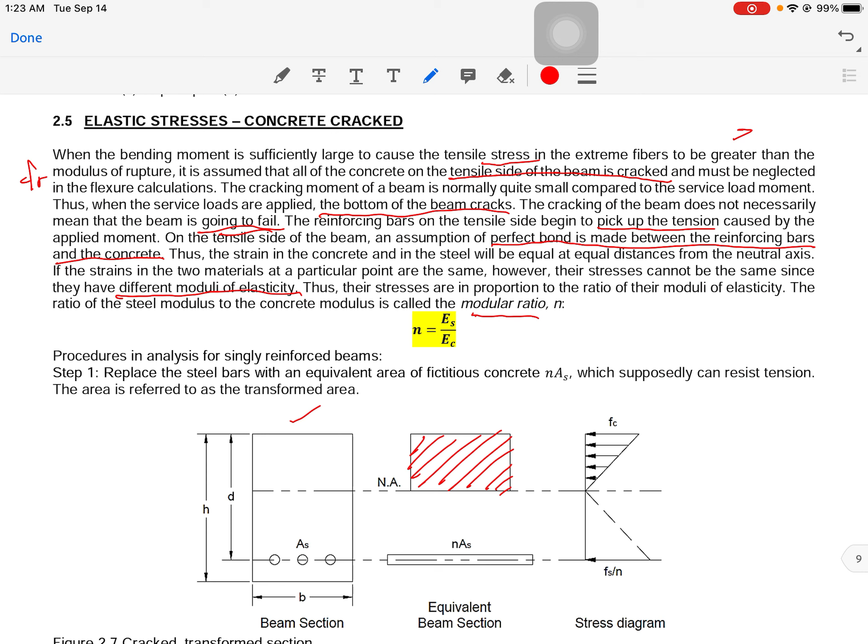So technically, steel and concrete do have different modulus of elasticity, and thus their stresses are in proportion to the ratio of their moduli of elasticity. Take note that the ratio of the steel modulus to the concrete modulus is called the modular ratio, or N. N is equal to ES over EC.

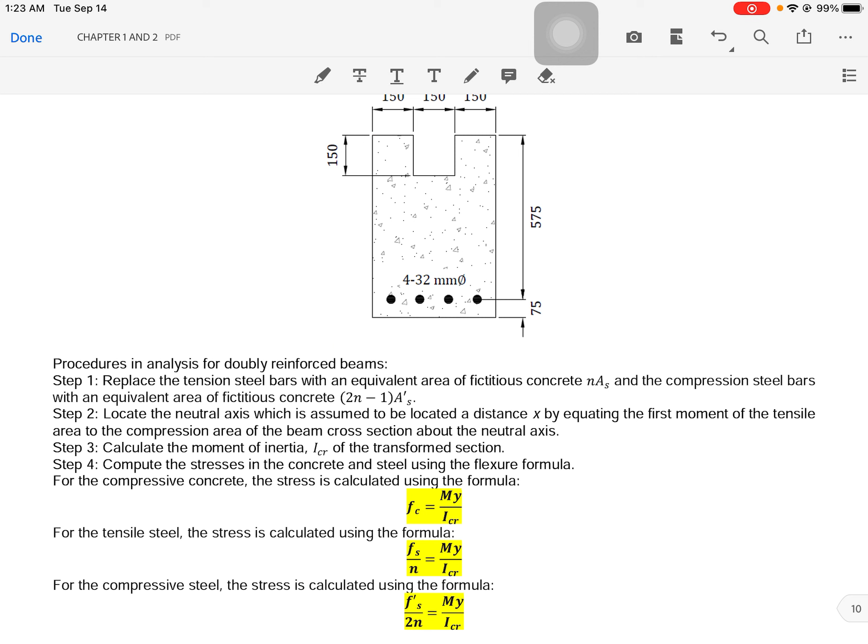So next for the procedure. We have two procedures, or analyses, that we will discuss: analysis for singly reinforced beam and analysis for doubly reinforced beam. Let us discuss first the procedures in analysis for singly reinforced beams.

So here are the steps in order to apply the analysis for singly reinforced beam using the transform method. First step is to replace the steel bars with an equivalent area of fictitious concrete, equal to N times AS, which supposedly can resist tension. So the area is referred to as the transform area, meaning from the original beam section you will have an equivalent beam section.

Since this portion of the concrete is considered cracked, the steel bars will resist and pick up the tension, and this should be converted into N times AS. The remaining part of the concrete is the compression portion of the beam - this is the concrete portion here.

Then for the second step, locate the neutral axis, which is assumed to be located at a distance x, by equating the first moment of the tensile area to the compression area of the beam cross section about the neutral axis. Later on we will discuss further what this x distance is in our example. Normally, x distance is denoted on the concrete portion, or the compression side.

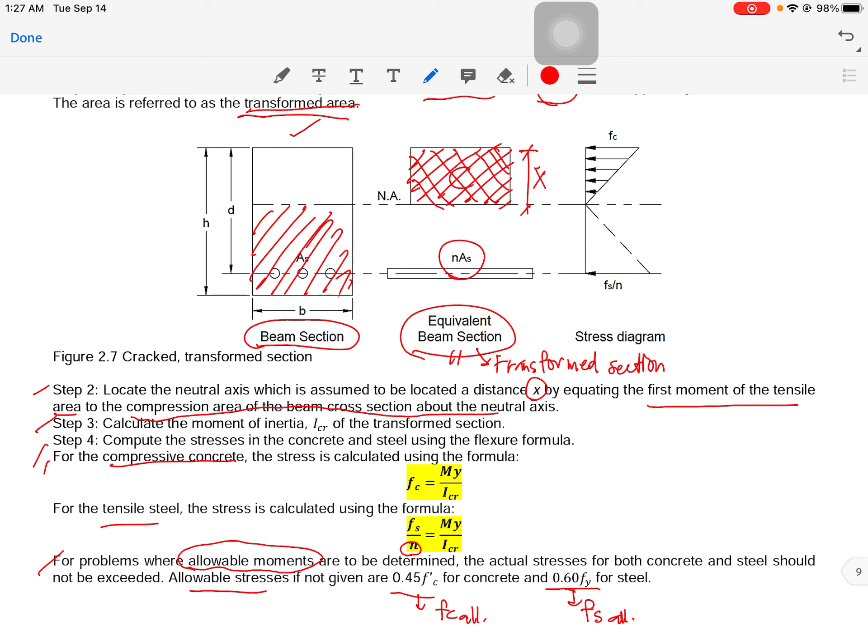So those are the simple procedures for a singly reinforced beam. Let us discuss the first example, which is example 2.3.

We are tasked to calculate the bending stresses in the beam using the transform area method given the following properties: F prime c is 21 MPa, given moment is 95 kilonewton meter, B or the width is 300 mm, the total height H is 500 mm, effective depth is 425 mm, and As is 3 bars at 28 mm diameter.

For letter B, we are tasked to determine the allowable resisting moment of the beam if the allowable stresses for concrete is 9.45 MPa and 138 MPa for steel.

Okay, let me draw this example 2.3. Let me draw the beam, guys. So our beam is this one here. We have three bars, 3 28mm bars. Then this is 500 mm.

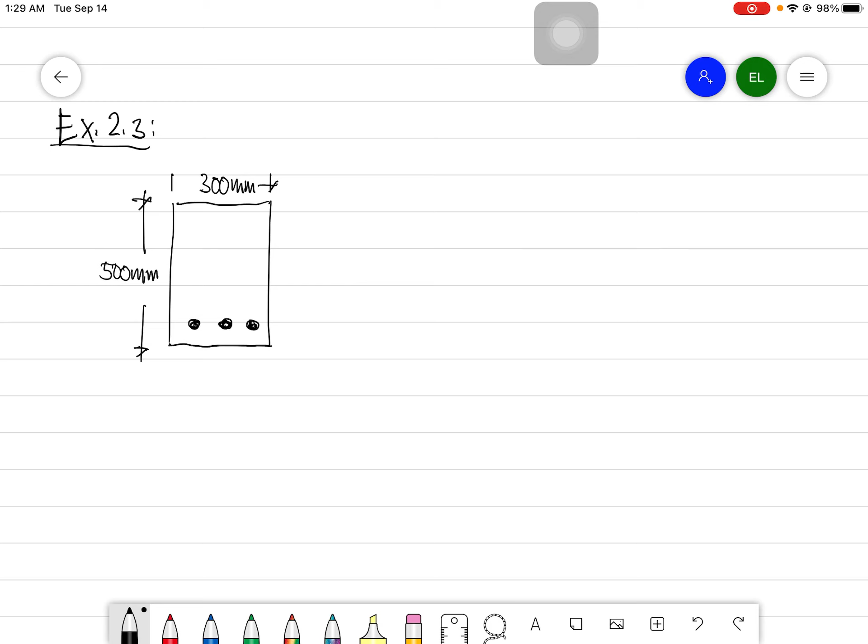Then this is 300 mm. Then we have the distance here, which is equal to 425 mm. So this is our beam section. Then we will have...

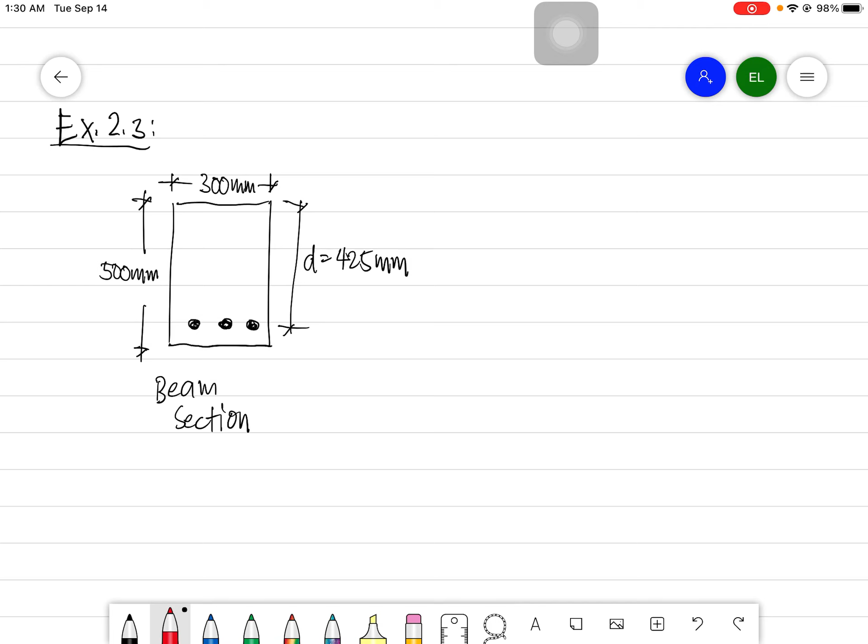From the question, we are tasked to get the bending stress using the transform area method. So let us follow the first procedure: we are tasked to replace the steel bars with the equivalent fictitious concrete. So we will have a transform area, or this equivalent beam section here.

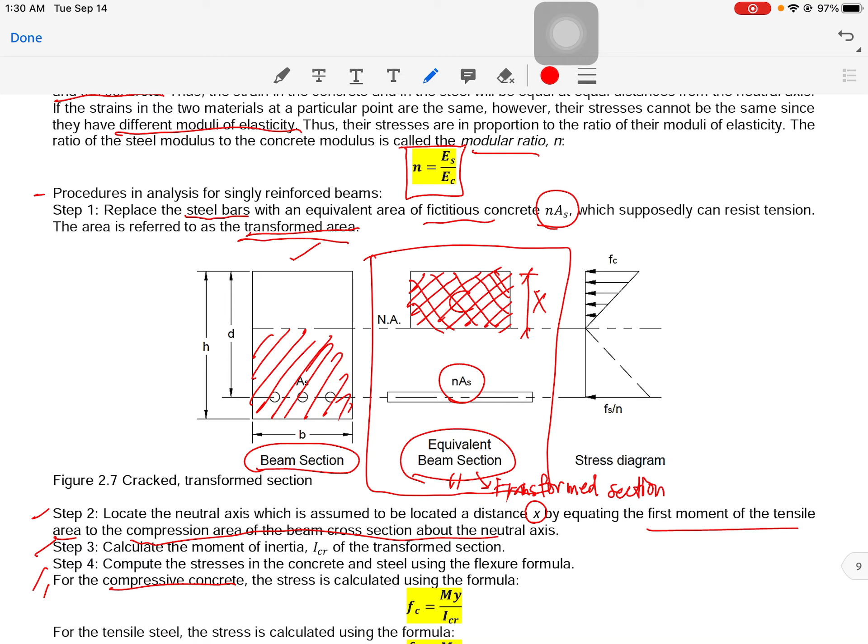So this is our transform section. Say this is the only concrete that remains, or the remaining concrete. So this is still 300 mm. Say this is the neutral axis, so we'll just assume that one. Then from the bars, we have this fictitious concrete area for the bar, which is equal to n times As.

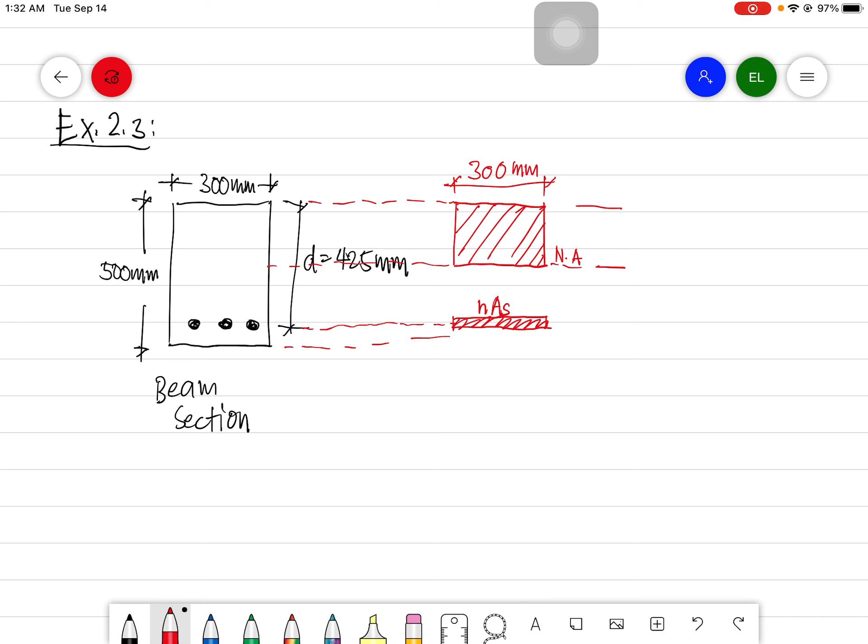With that, let us proceed to the second step, which is to locate the neutral axis, assumed to be located at an x distance, by equating the first moment of the tensile area to the compression area of the beam cross section about the neutral axis. So this is now the x distance being mentioned, and from the neutral axis to this portion of the bar, this is d minus x.

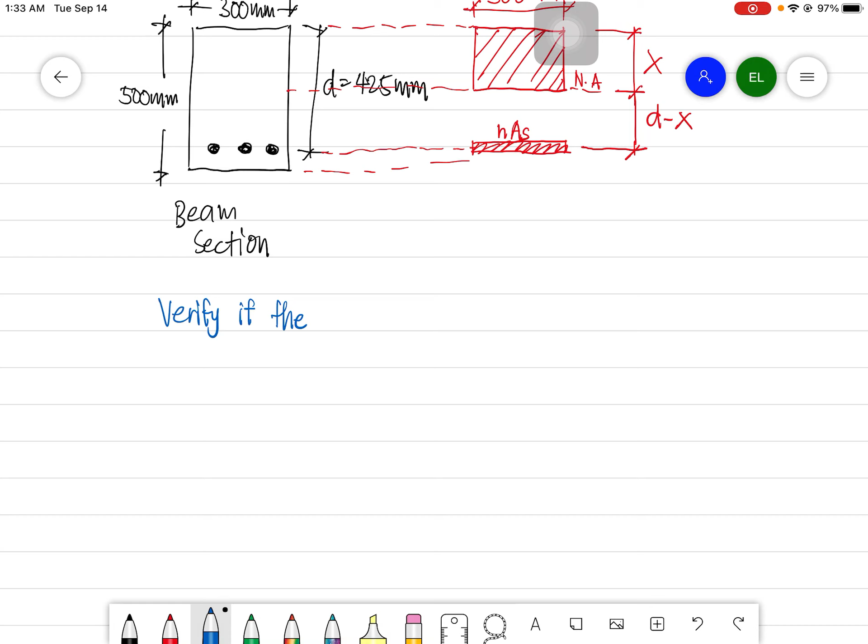In order for us to locate the neutral axis, first we need to verify if the beam is cracked. So let me verify that one. We have the formula that we already know, that...

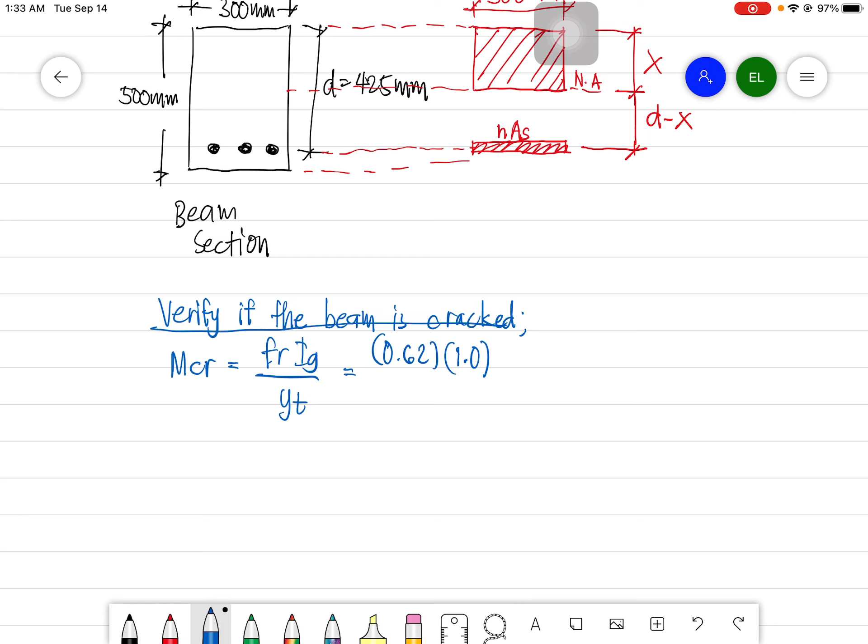MCR is equal to FR IG over YT. We have FR, which is equal to 0.62, times 1.0, since this is a normal weight concrete. Then we have the square root of 21.

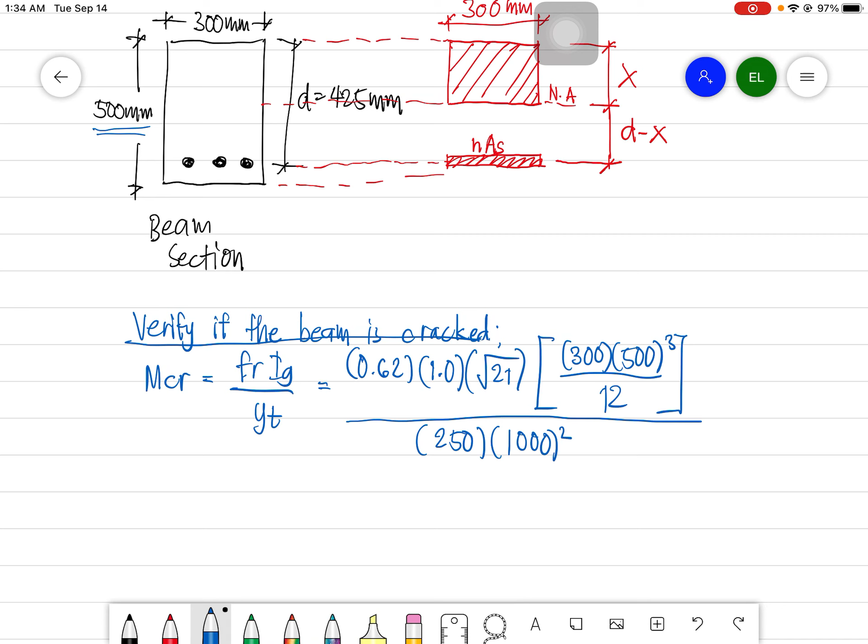Multiply it with IG, which is equal to B H cubed over 12, then all over YT. So YT is half the total depth, which is 500, so YT is 250 mm. Then multiply it with 1000 squared, so that we could get a value of moment in kilonewton meter unit. So we have MCR, which is equal to...

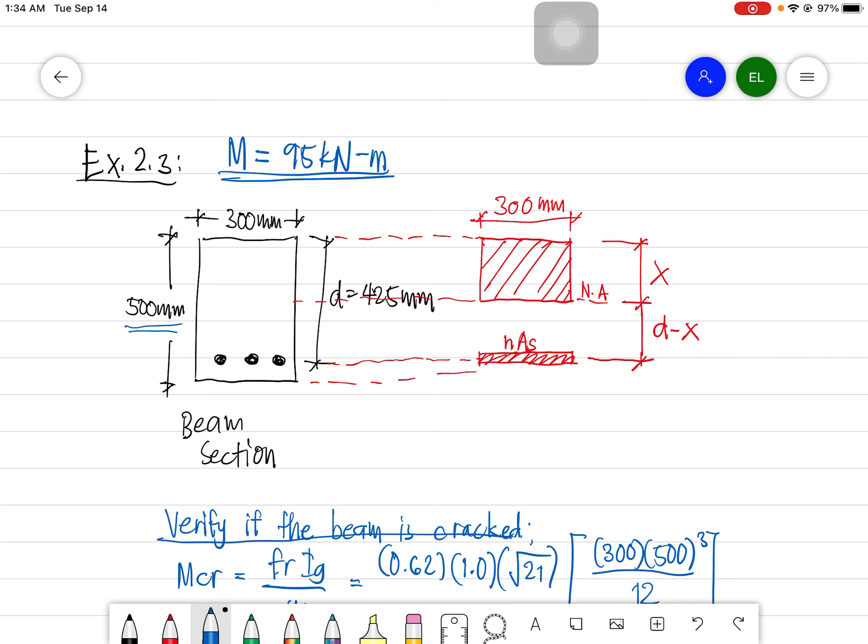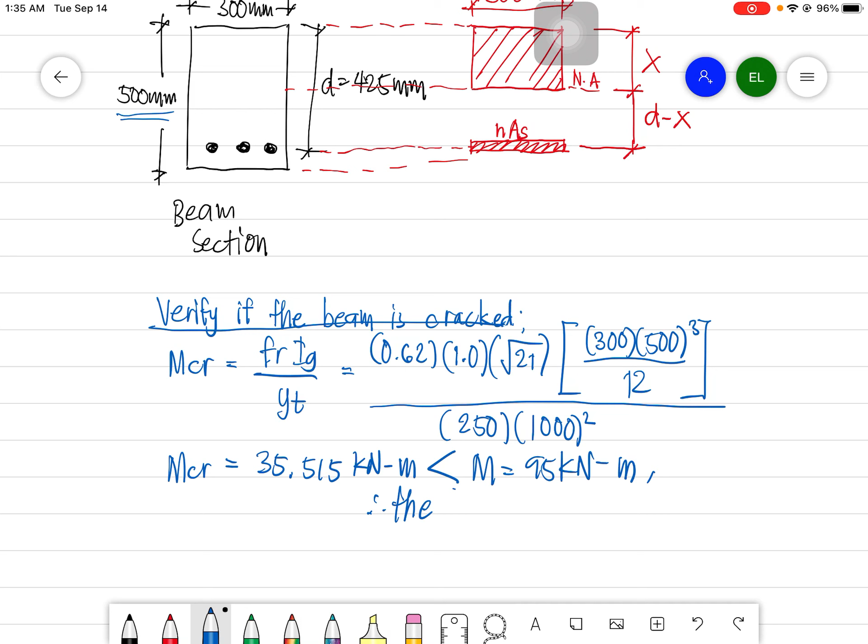35.515 kilonewton meter, and from the given, M is equal to 95 kilonewton meter, the moment applied in the example. Therefore, since MCR is less than M, which is 95 kilonewton meter, the beam is cracked.

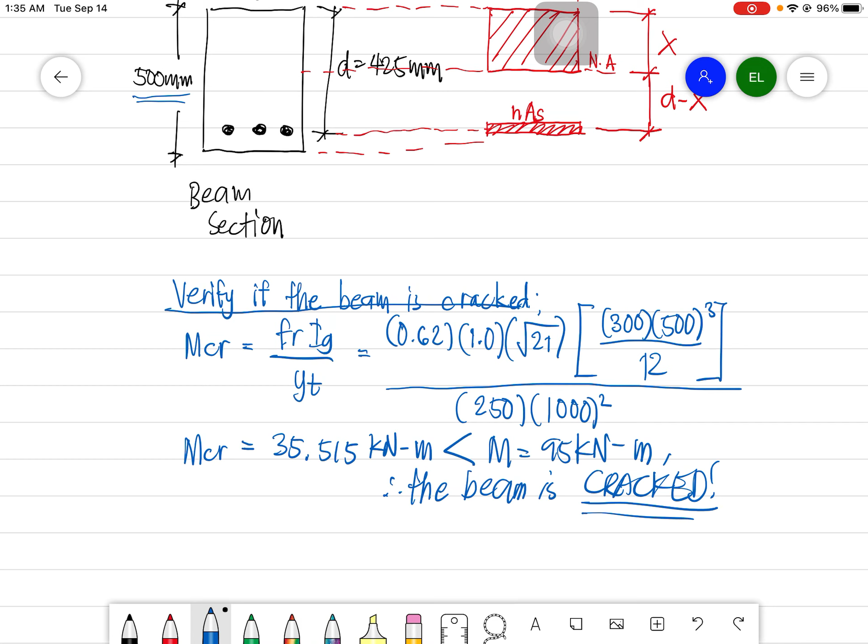Okay, so we already verified that the beam is cracked. So therefore we are on the right track of computing the bending stress using the transform method. Since it is cracked, we are now tasked to locate the neutral axis.

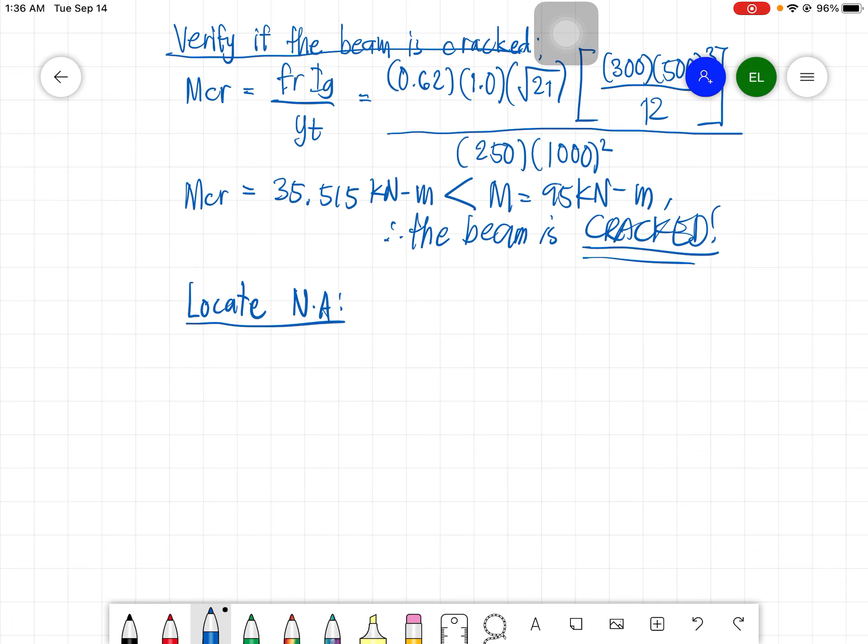So, locate NA. First, we will get the first moment of the tensile area with respect to the compression area about the neutral axis, as mentioned here, then equate the two: the first moment of the tension area and the compression area.

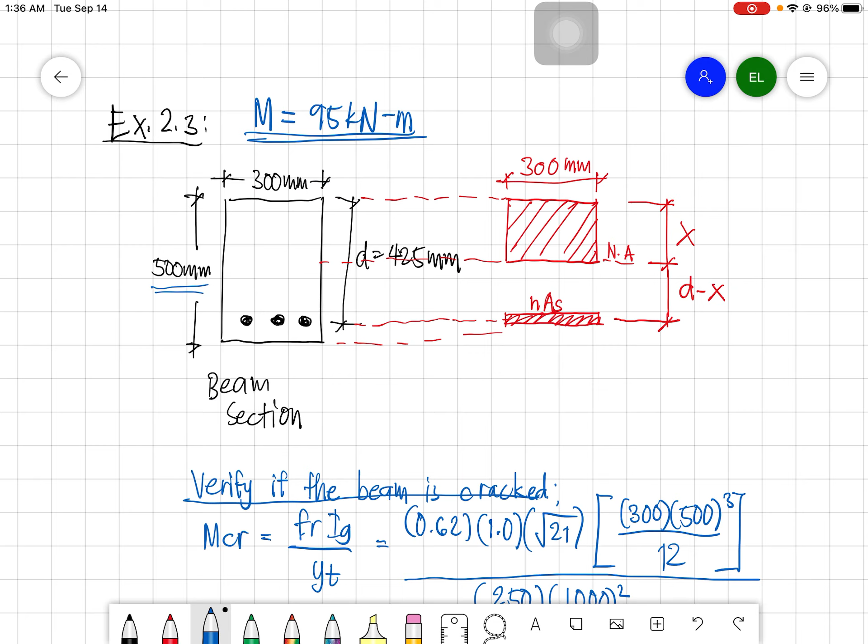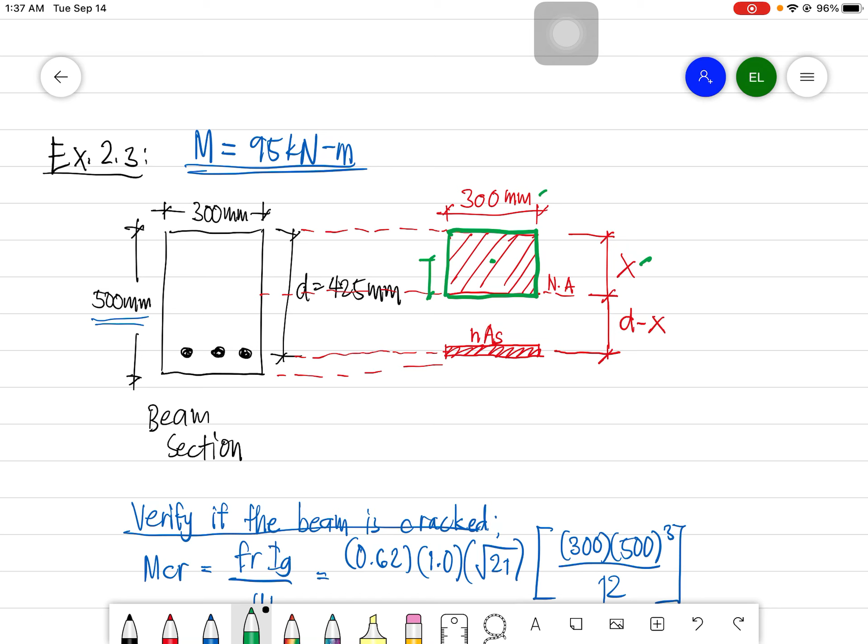In order to get the first moment, we have 300 times x, times x over 2 for the compression part. This is the area, times bar x, which is x over 2.

Then equate it with the tensile area, which is the nAs, times d minus x, this one here, the nAs then times d minus x.

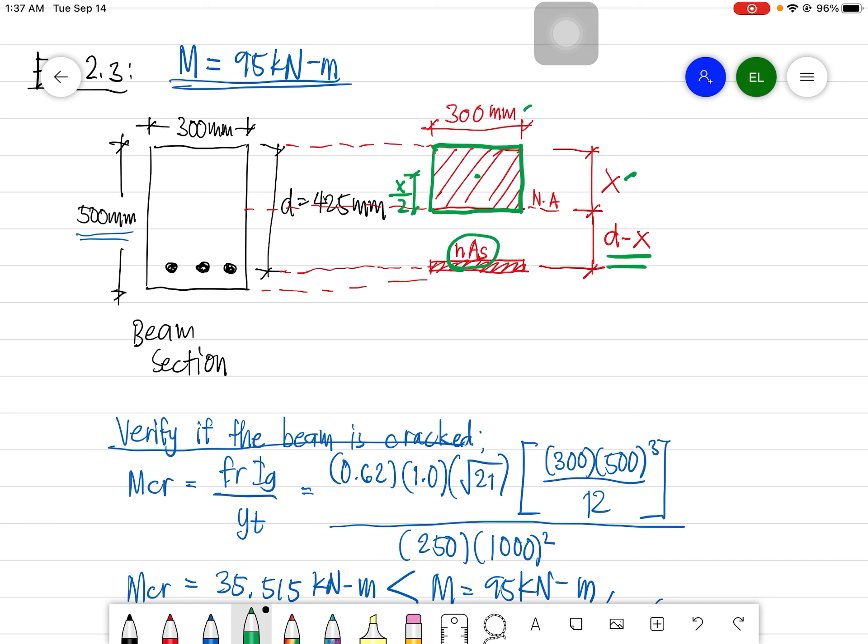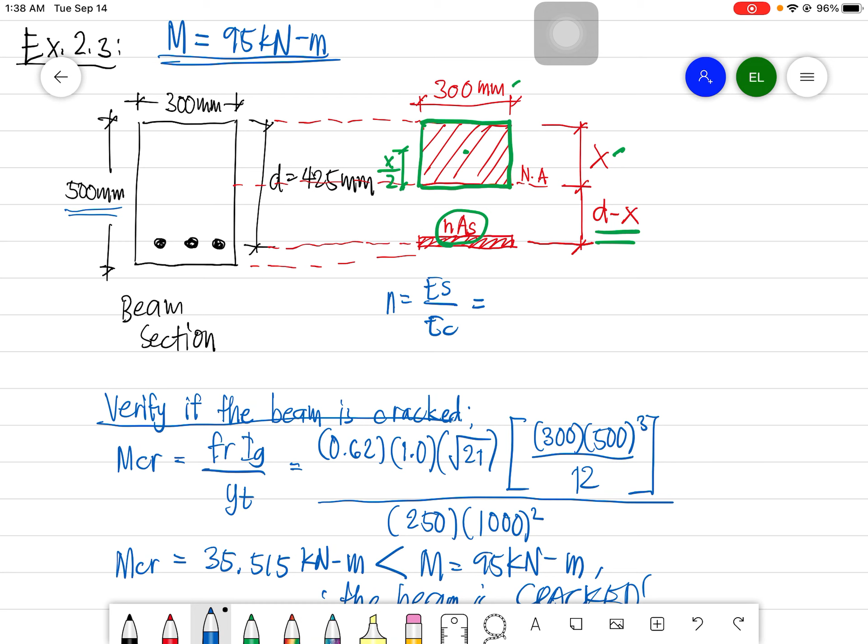So let us compute first the nAs. N is equal to Es over Ec, which is equal to 200,000 MPa over 4,700 square root of 21. Note that n should be in whole number, and I think this is rounded off to 10. So n is 10.

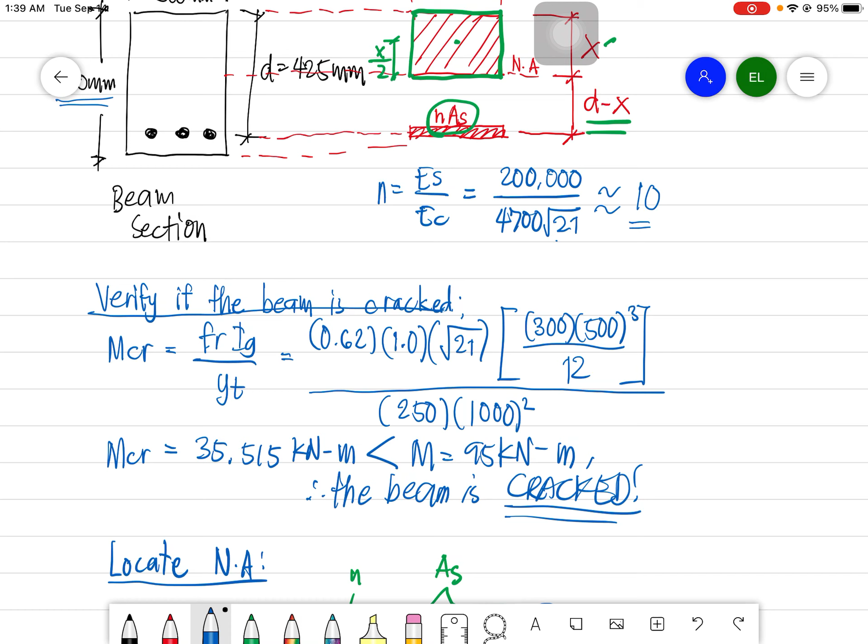So this is now 10, then times As. Since you have the diameter, the area of the bar is pi over 4 times 28 squared, then times 3, since we have 3 bars. So this is N, and this is As, the area of the circle of the bar, times 3 pieces of bars.

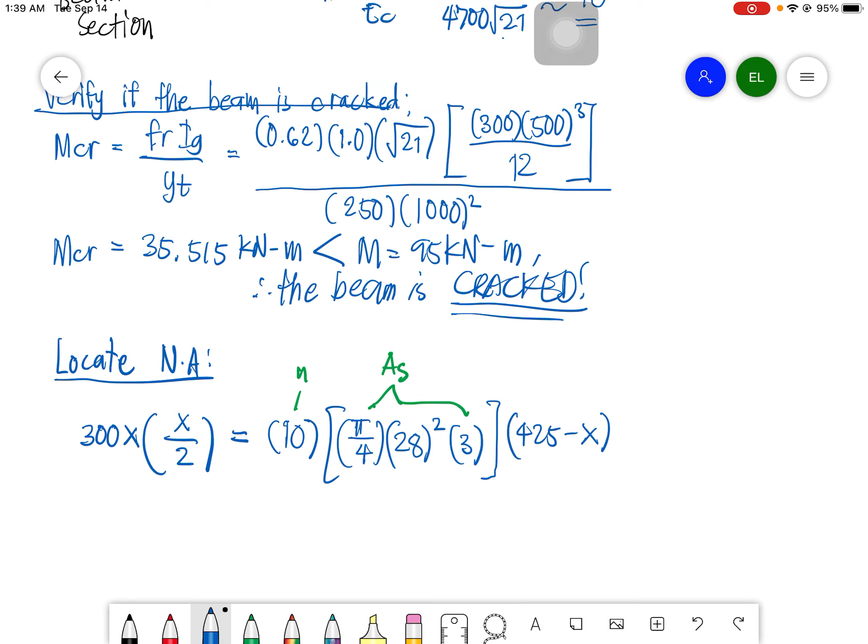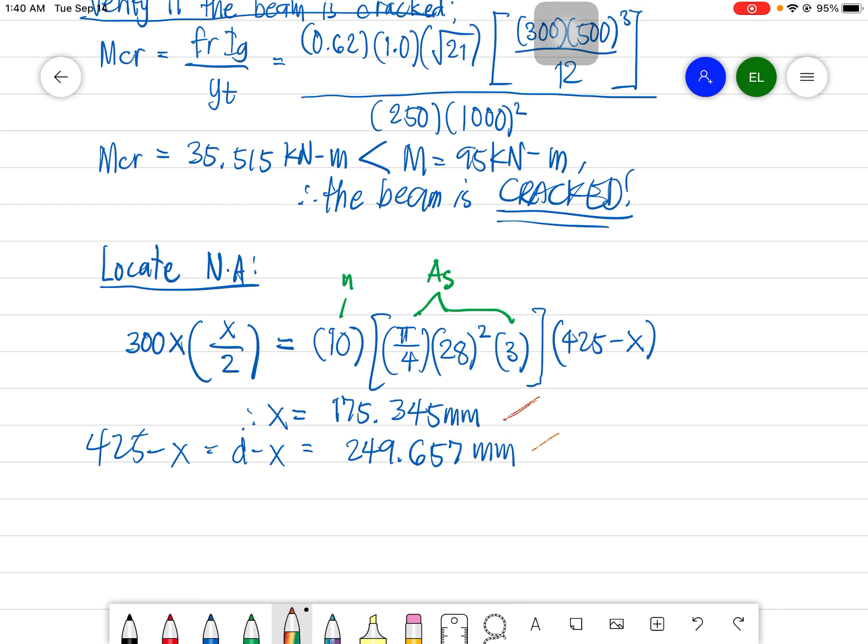Then do not forget bar x, which is d minus x, wherein d is equal to 425 minus x. Try to calculate that for you to get the value of x. I think x is equal to 175.345 mm. So let me get the value of d minus x as well, which is equal to 249.657 mm, since this is 425 minus x. So these are the values for x and d minus x.

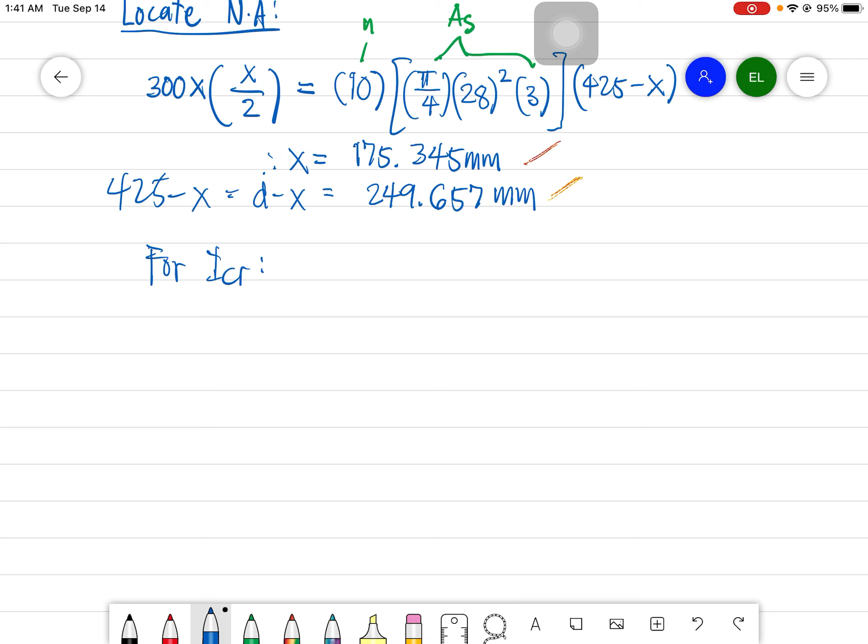Okay, so now we need to proceed to our next step, which is to calculate the moment of inertia of the cracked section, or the transform section, which is the ICR. For ICR, we have ICR equals summation of Ix plus Ad squared. I think you're familiar with this one: the local moment of inertia plus the transfer formula, which is area times d squared.

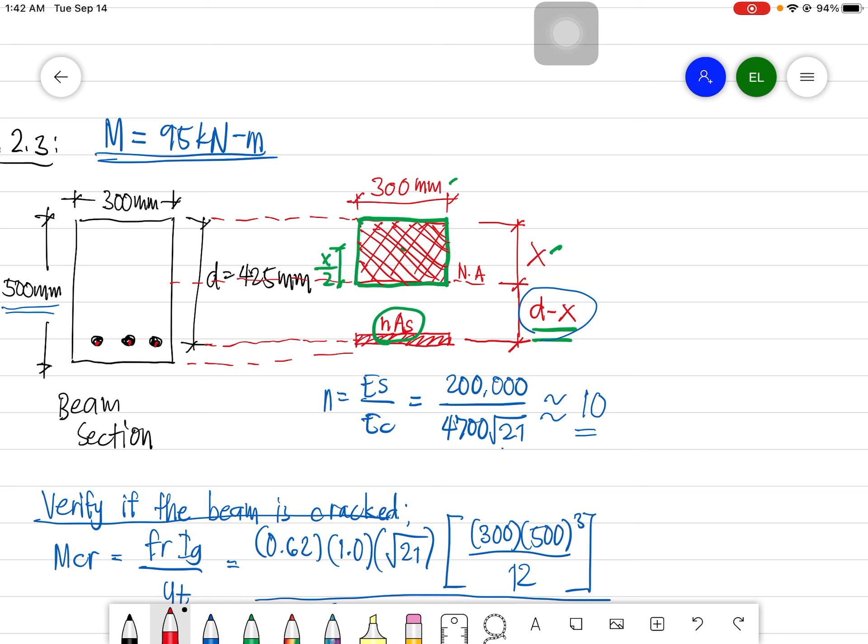Let me get first the inertia for the concrete portion, or the compression side, which is equal to 300, b, x cube over 12. Note that this came from this one, the concrete portion on the compression side of the beam, so we have h cube over 12. Definitely we have the value for x already, this one here.

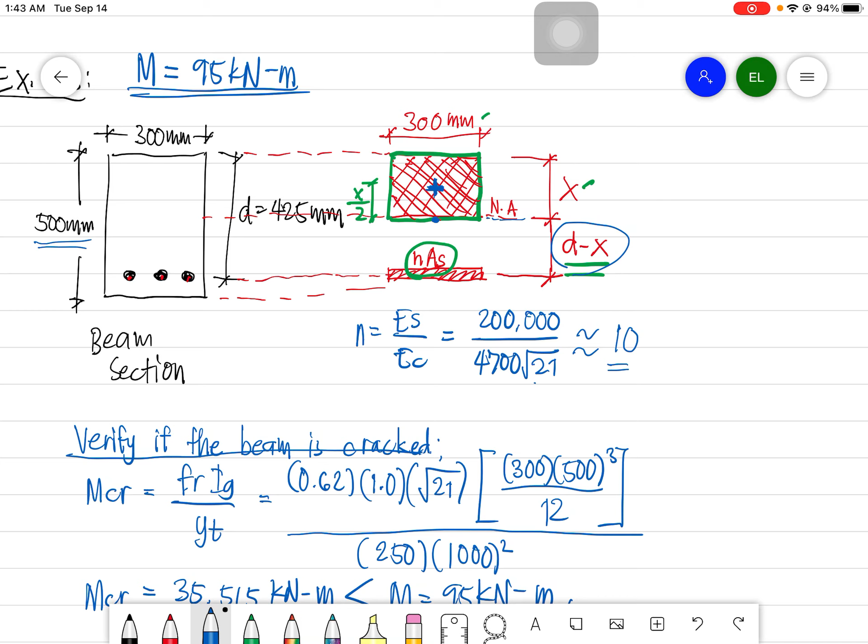Then plus area, 300 times x, then x over 2 squared. We need to transfer that since the local centroid of the concrete is here, and the neutral axis, or this point here, is the global centroid for the section.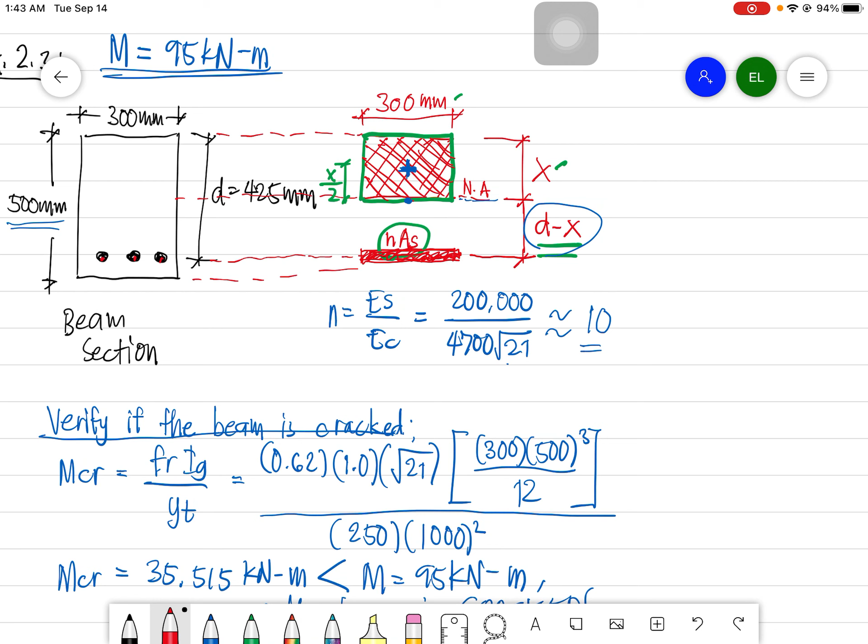So we need to transfer the inertia of the concrete portion. Then we are already finished with the concrete side or compression side, so we need to add the tension side, which is nAs times d squared. We don't have Ix for the tension side because that is very little in portion, as you can see here, so this is now converted into Ad squared.

So let me get the value of nAs. I think nAs is equal to 18,472.565 mm squared. Please verify if this is really the value for this calculation here. So that is area, which is 18,472 point... let me erase this one.

18,472.565, times area d squared, 425 minus x squared. Take note that you may still simplify this equation here. So that would be simplified into bx cubed over 3. Just simply add 1 over 12 then plus 1 over 4. Now if you try to simplify this equation, that will be equal to bx cubed over 3, then plus 18,000. Let me rewrite 5, 6, 5, then 425 minus x squared.

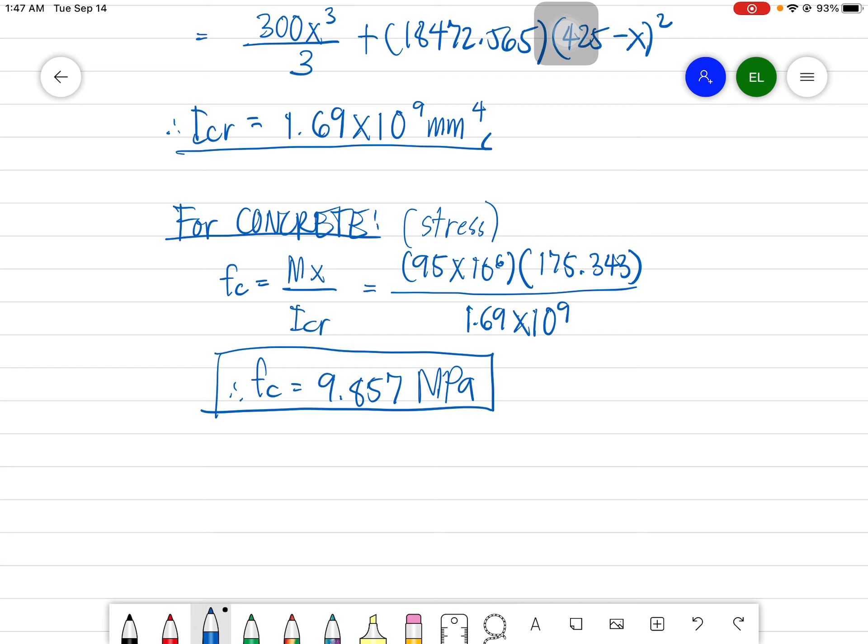So this is the stress for concrete, the concrete stress. Then for steel,

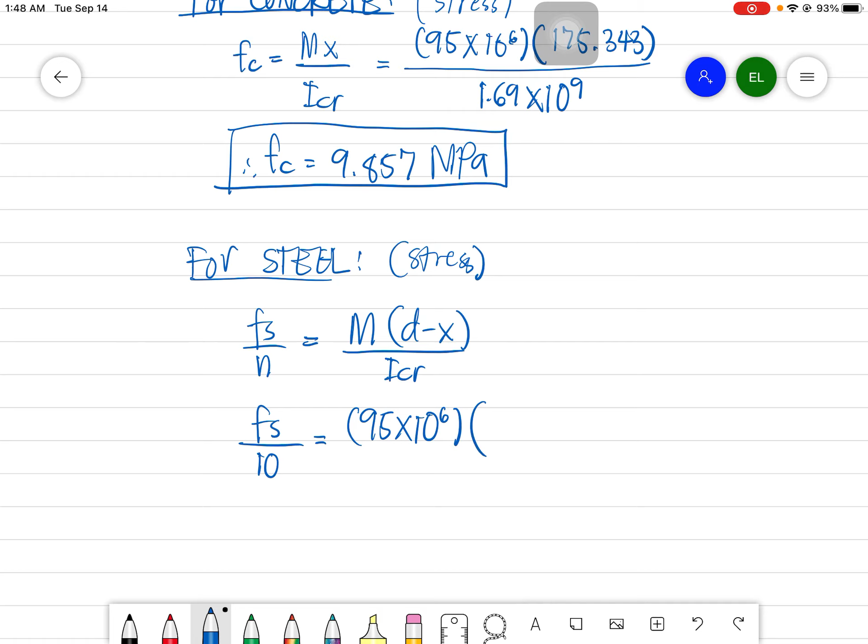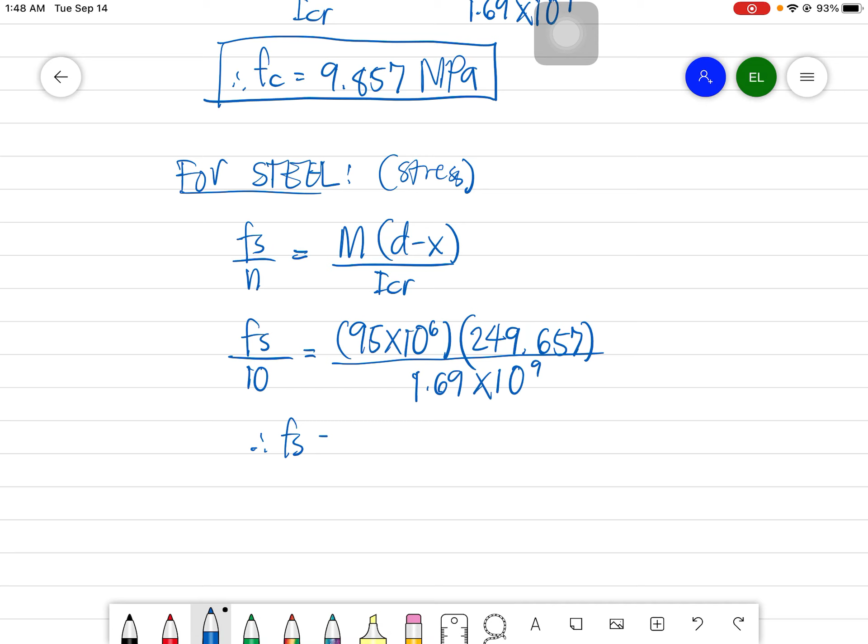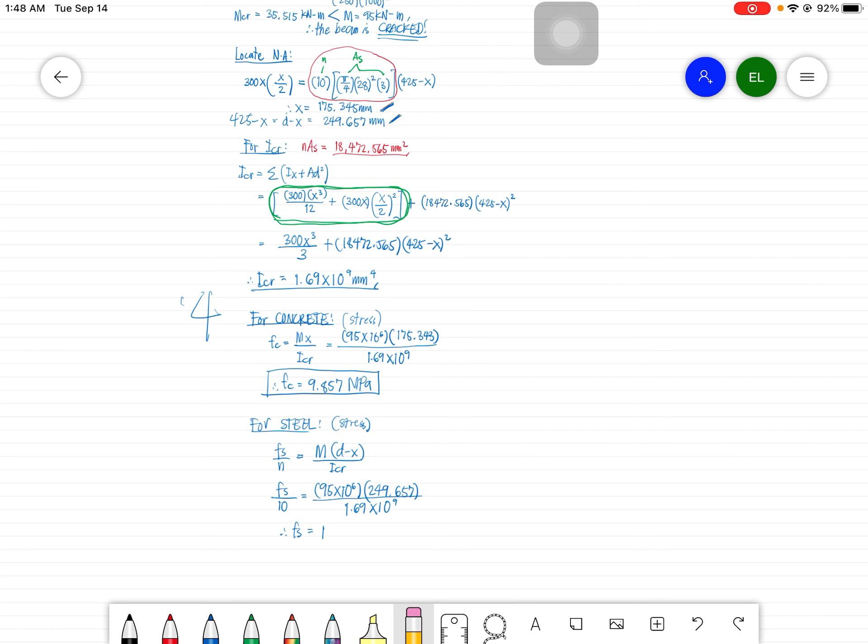stress for steel, so we have Fs over N, which is equal to M times D minus X over ICR. Fs over N is 10, M is 95 times 10 raised to 6, D minus X as computed earlier is equal to 249.657, then all over 1.69 times 10 raised to 9. Therefore Fs is equal to 140.34 MPa. So that is for our Fs.

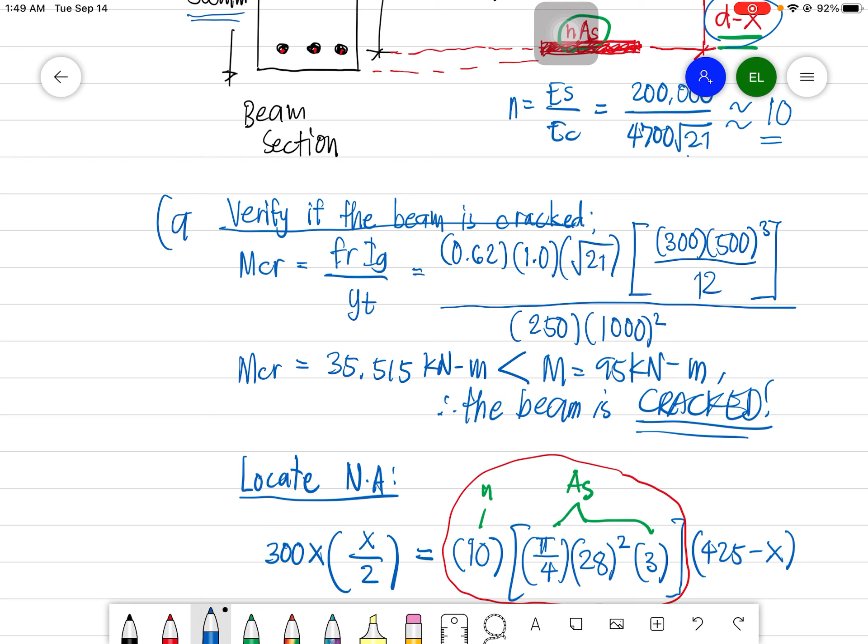So next, that is for letter A. This is for letter A. Now let me solve letter B.

So letter B, we are tasked to determine the allowable resisting moment of the beam with these given allowable stresses for concrete and steel respectively. So we have, for concrete, we're given FC allowable, that is less than or equal to 9.31 MPa.

So now we have M. So the formula of FC, which is M allowable times X over ICR should be less than or equal to 9.31 MPa. So we have M allowable, let me multiply this with 1000 squared for us to get a moment in kilonewton meter, then times 175.343, over ICR, which is 1.69 times 10 raised to 9. This is less than or equal to 9.31 MPa. So therefore M allowable, using the concrete condition of stress, which is 9.31, this is equal to 89.73 kN-m.

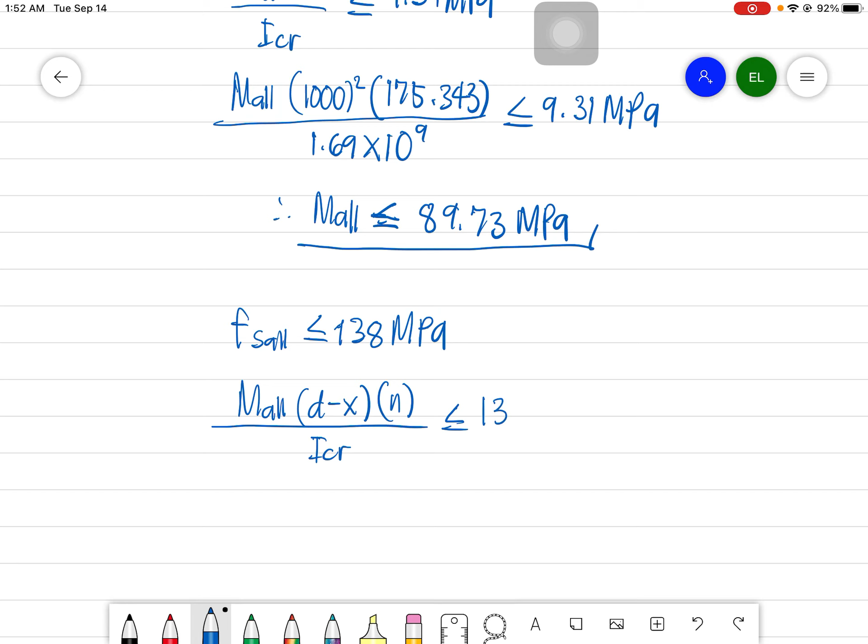Then how about if we'll be using the FS allowable, which is less than or equal to 138 MPa. So we have that formula for Fs, and we have M allowable times D minus X times N, over ICR. This should be less than or equal to 138 MPa. So we have M allowable, again multiply it with 1000 squared, then we have 249.657, that is our D minus X, then we have our modular ratio, which is 10, over ICR, which is 1.69 times 10 raised to 9, less than or equal to 138 MPa. So we have therefore the M allowable, using the allowable stress for steel, which is 138 MPa, equal to 93.42 kN-m.

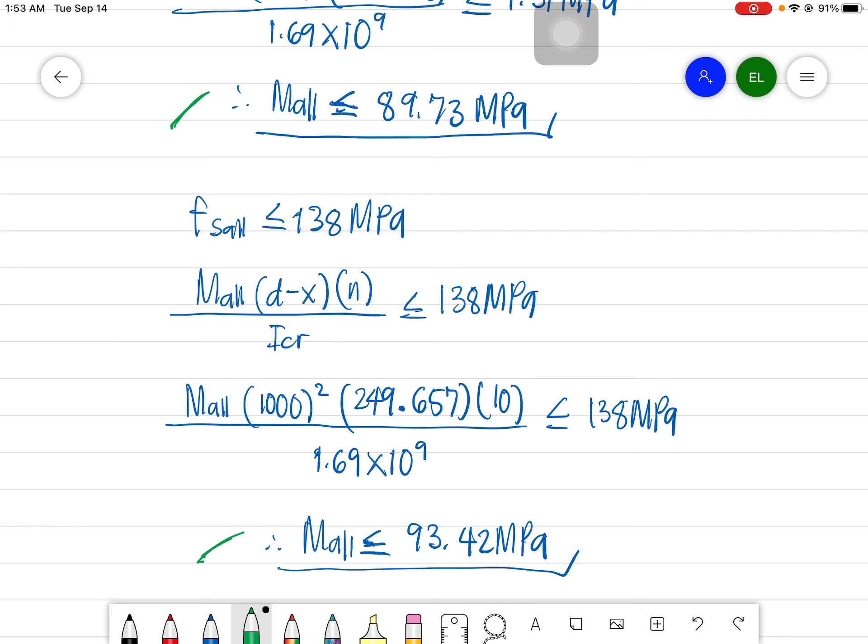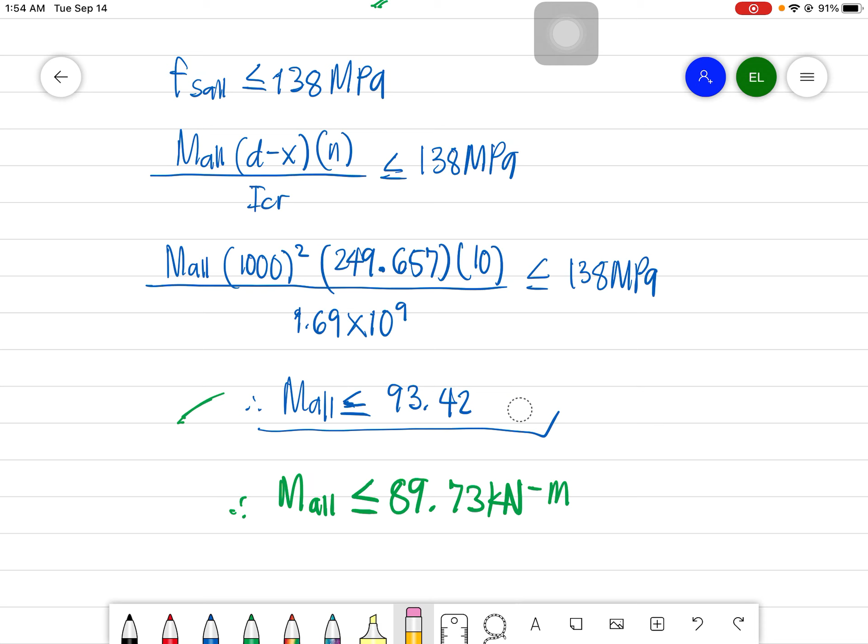So the question now is that we have two values of allowable resisting moment for the beam: one for concrete, and one for steel. But we have to choose one allowable resisting moment compatible for both concrete and steel conditions. So we need to choose between the two values, the lesser value, which is 89.73 kilonewton meter. Let me correct this, this must be in kilonewton meter, as well as this one.

Okay, this should be in kilonewton meter. So therefore the answer is 89.73. So the explanation for that one is that...

If you will consider this value, then your beam might fail, might fail in the compression side, in the concrete side, since the allowable moment for the concrete is only 89.73.

So if you apply this moment into the steel portion, or the tension side of your beam, that won't hurt, since the allowable moment there is 93.42. So you still have an allowance of 4 kilonewton meter.

So we get the lesser value to ensure that both the concrete and steel are safe when this moment is applied on the beam, with the following conditions: Fs allowable, which is 138, and Fc allowable, which is 9.31.

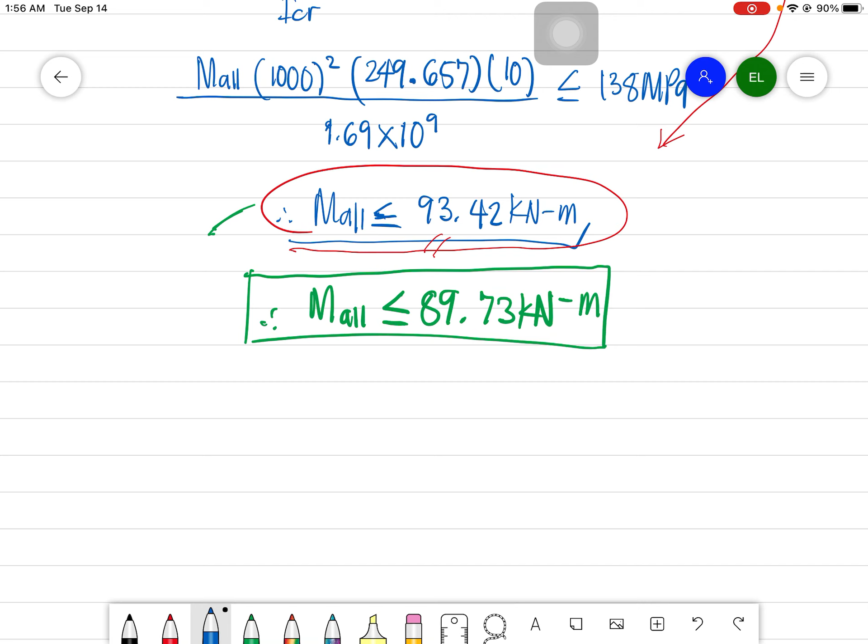I hope it's clear already for our first example. So that is for our first example. Let us proceed to our next example, which is example 2.4.

For example 2.4, we are tasked again to calculate the bending stress on the concrete and reinforcing steel using the transformed area method, with the value of n, which is 9, and the applied moment of 339 kilonewton meter, with the following properties: width of the web, width of the flange, height of the flange, and the D distance, which is 700 mm.

Expect that this is a T beam. This is a T beam, guys. So let me draw this one. So this is a T beam.

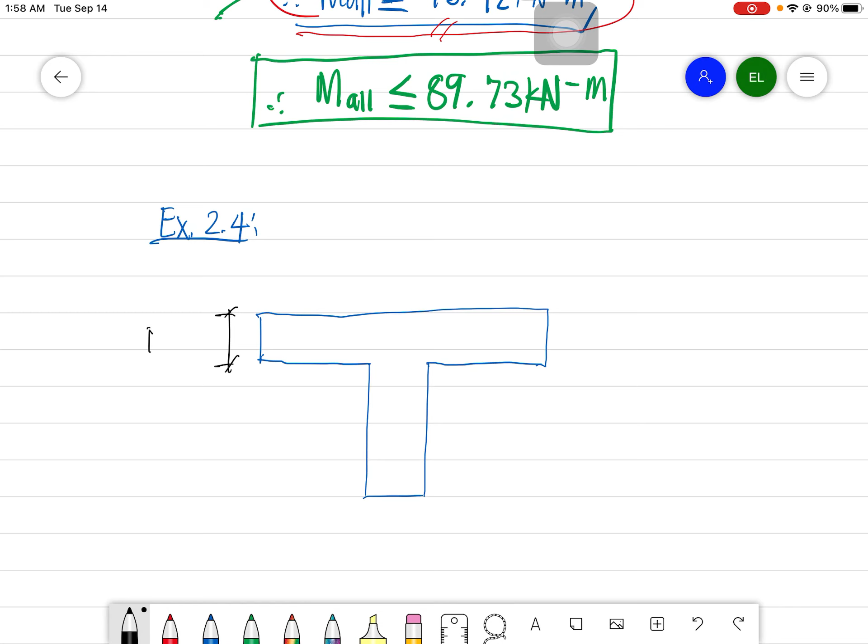So this is 125 mm, and this is 1500 mm. This is BF, this is HF, then we have BW, which is 300 mm.

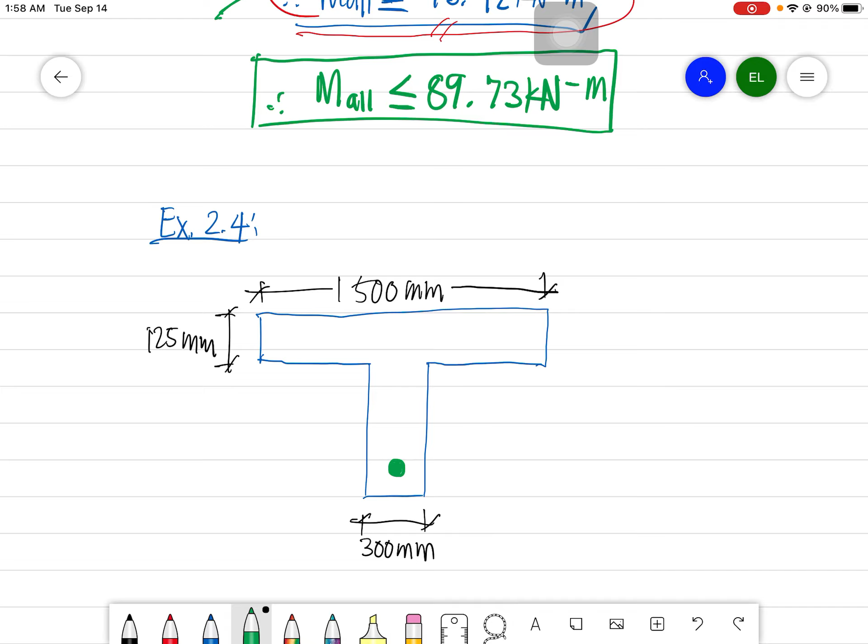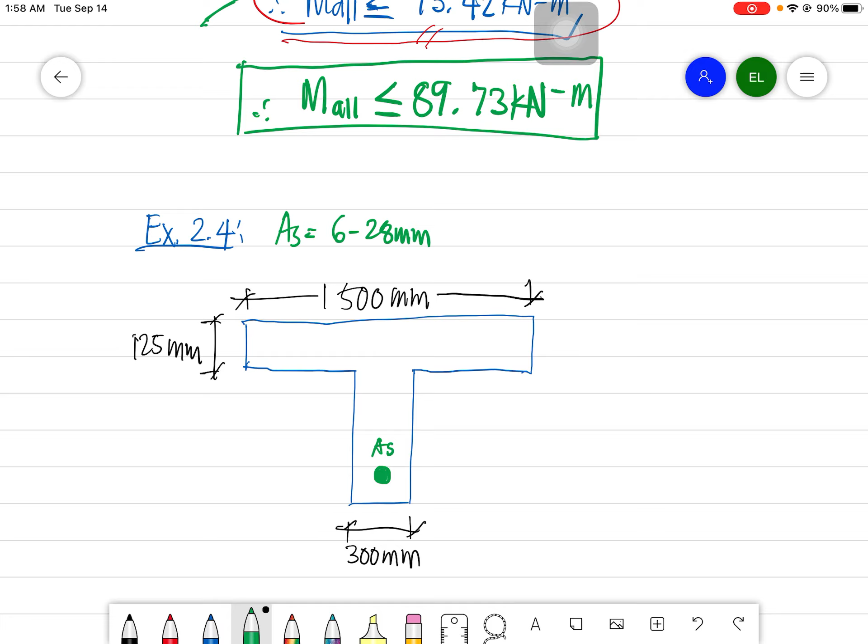Then we have AS, let me put AS here. So we have AS in this portion. I think AS is given, which is 6-28 mm. Then the value of D is equal to 700 mm. That is for the T beam portion.

So first, verify if it is cracked, but I assume that this is cracked already, since the applied moment given, which is 339, is very large or massive. Now this is a massive moment, so you may still verify if it is cracked if you wanted to.

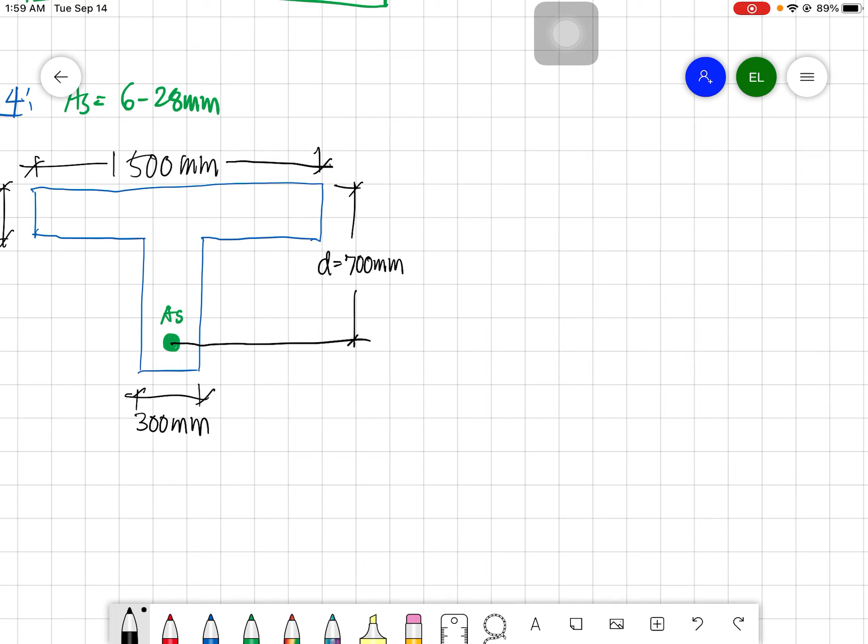Proceeding to our first step, which is to transform this one into a cracked section. So there are two tendencies for the values of x, guys.

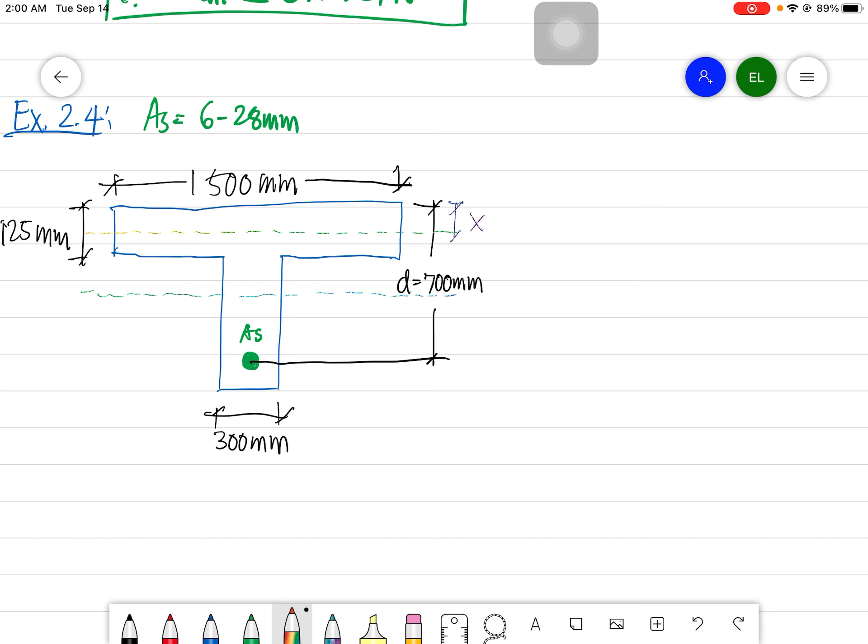Now x might be within the flange, meaning your x might be within this portion here, or there would be tendencies that your x might be within the web. So we have tendencies for this: the x value is within the flange, or your x value might be within the web.

Just assume that it is in the flange, then later on the value of x will reveal that. So if the value of x is less than 125 mm, which is the HF, then it is within the flange; if x has a greater value than 125, or HF, then this is within the web. I hope it's clear now in this matter.

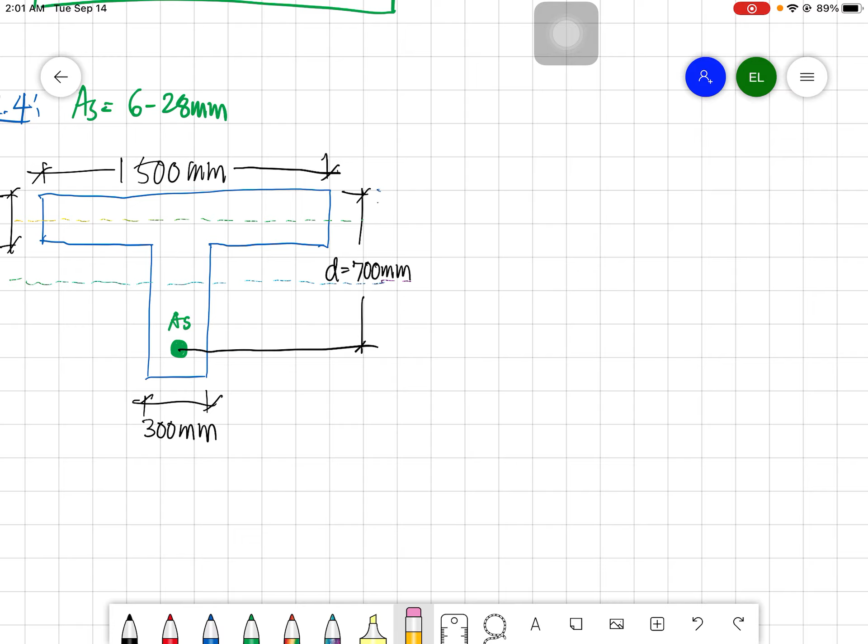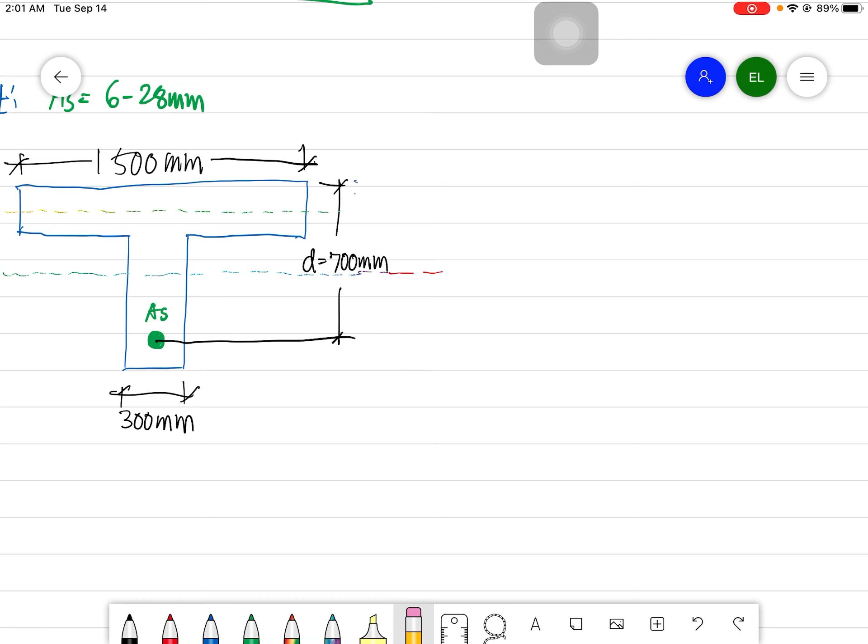But for now, let me assume that x is within the web. Okay, within the web. Now this is our assumption.

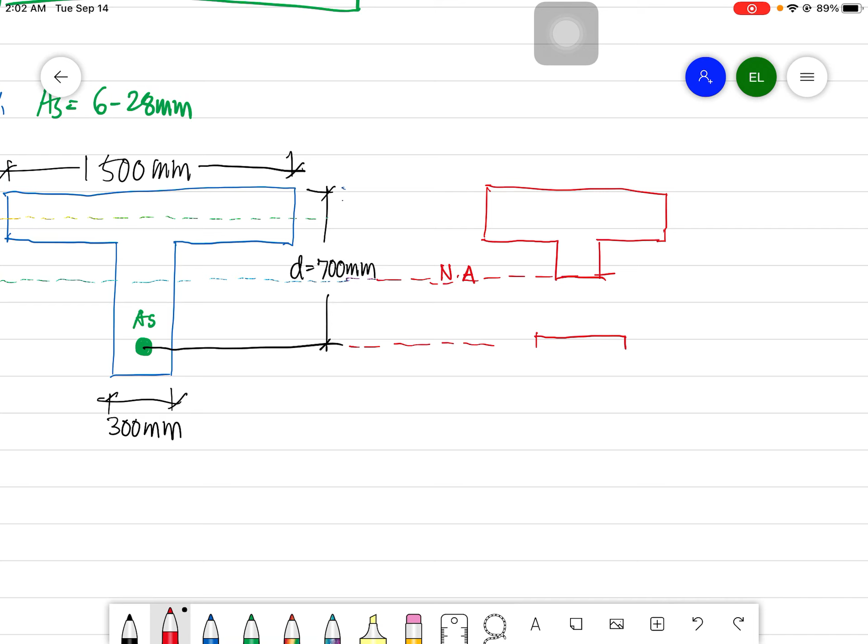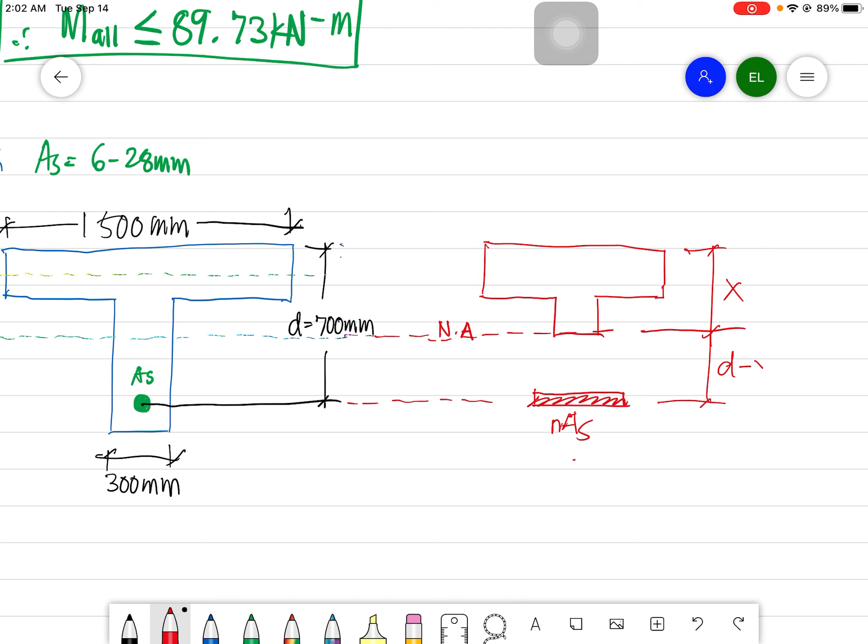So do not forget this one, the NAS. Okay, so this is our NAS. Say this is our x, then this is our d minus x.

So this is 1500 mm, then this is 125 mm. So definitely this portion here has a value of x minus 125 mm, and this is still 300 mm.

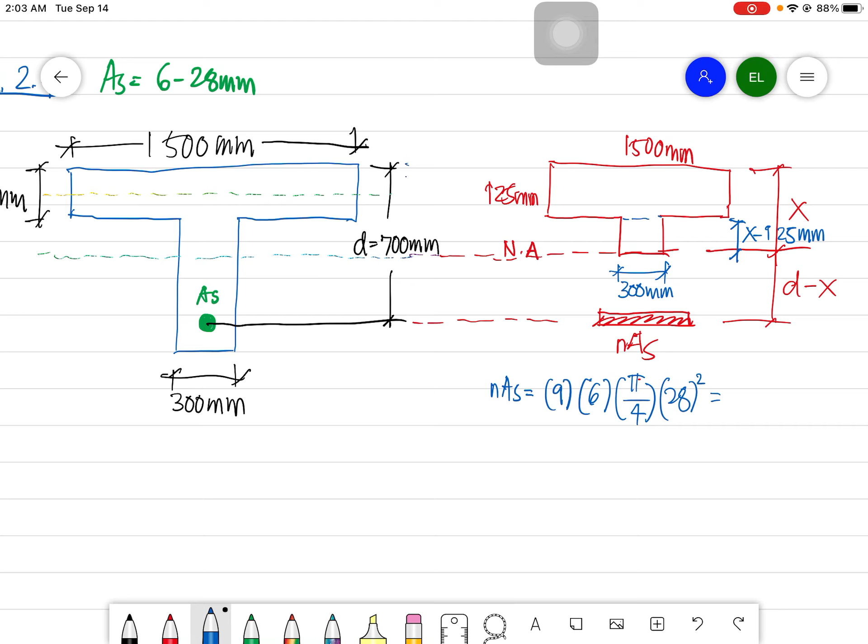So let me compute first the value of NAS. NAS is equal to 9, given n is equal to 9, times 6, times pi over 4 d squared. So this must be equal to 26,507.19 mm squared. So that is our NAS.

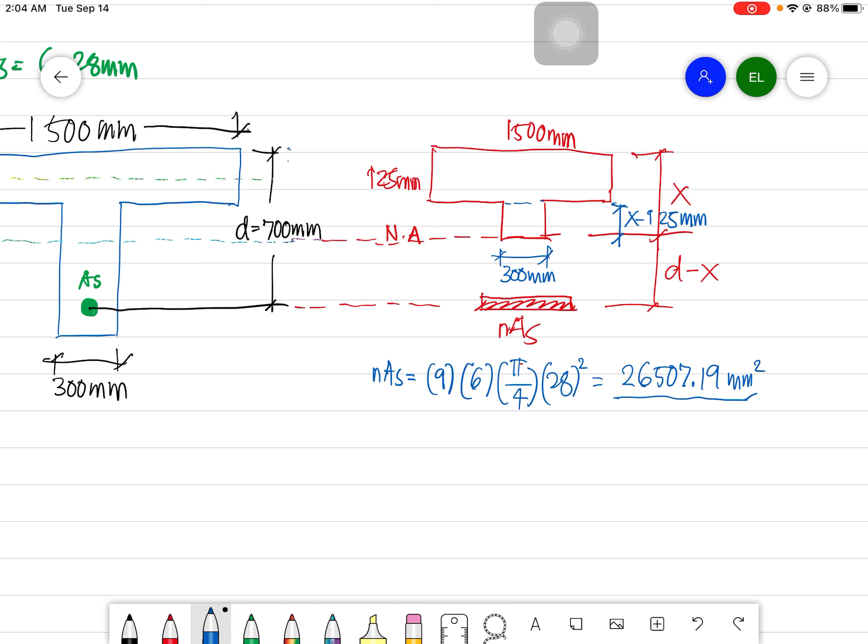So now locate x. Now, so we are tasked to locate x.

Okay, so to locate x, we need to get the first moment of the compression and tension side and equate the two.

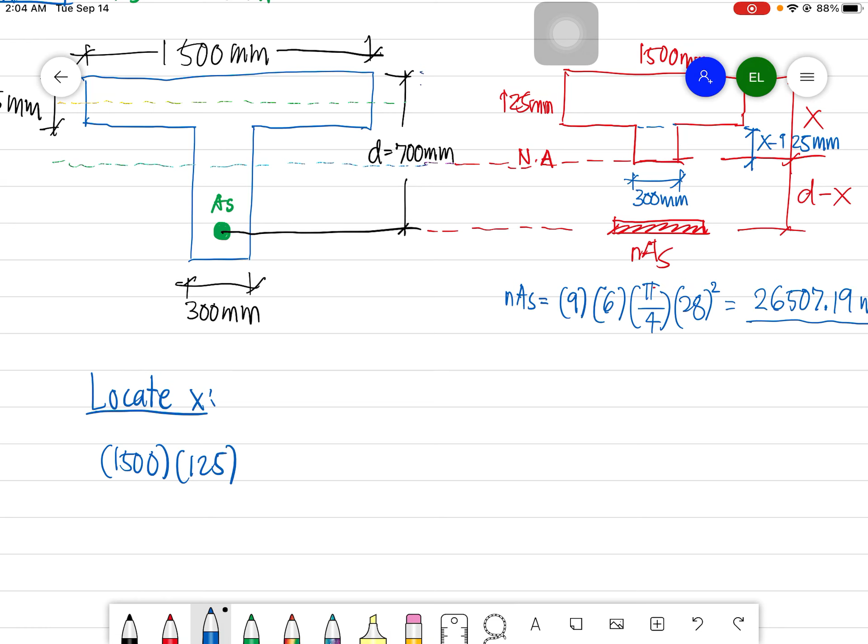So we have 1,500 times 125. This is x minus 125 over 2. So what we're calculating here is this portion of the flange.

So that is x, so this is I think 125 now. That one there is 125, now 125 over 2. So x minus 125 over 2, then plus 300, this is the web portion. Take note, this one here is the flange portion.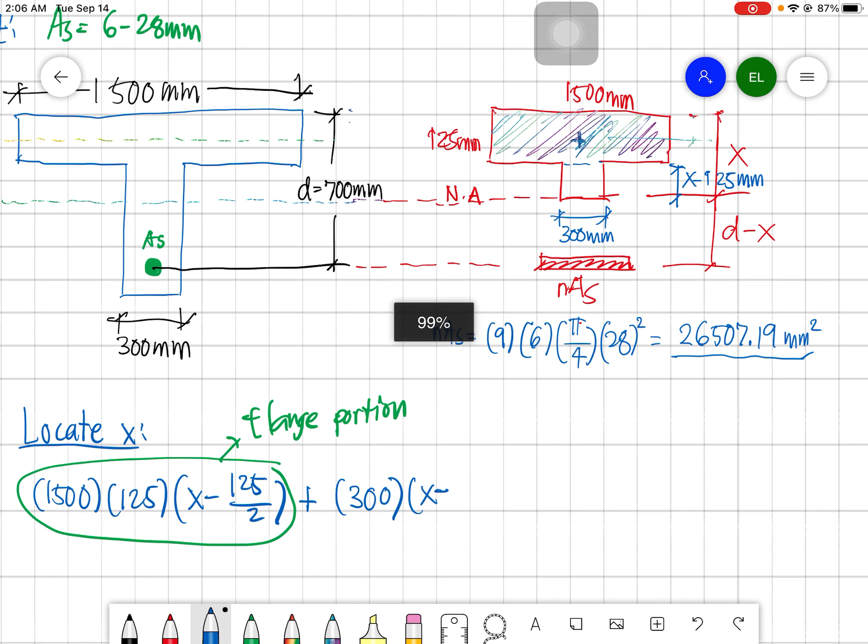Now this is x minus 125 here. Okay, x minus 125, then also get the centroid distance, so that is x minus 125 over 2.

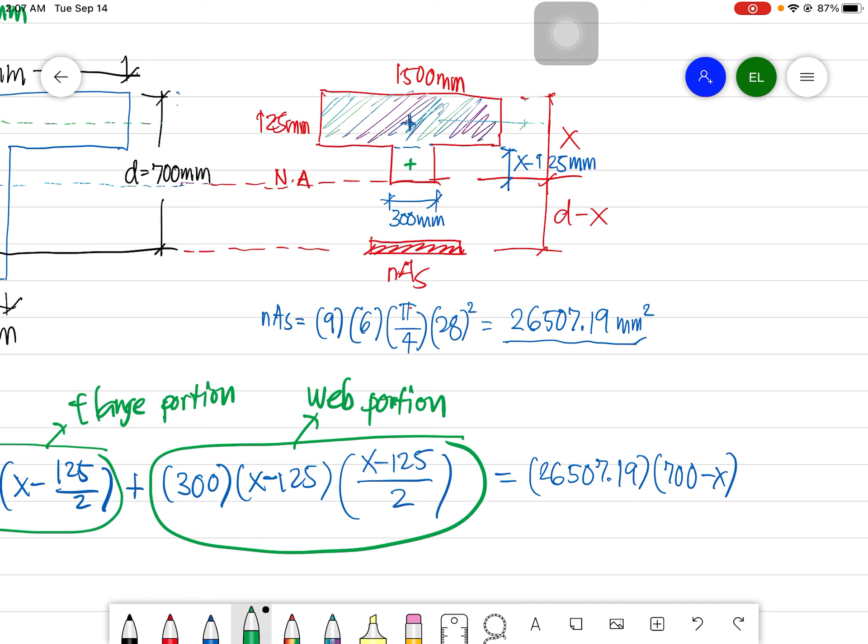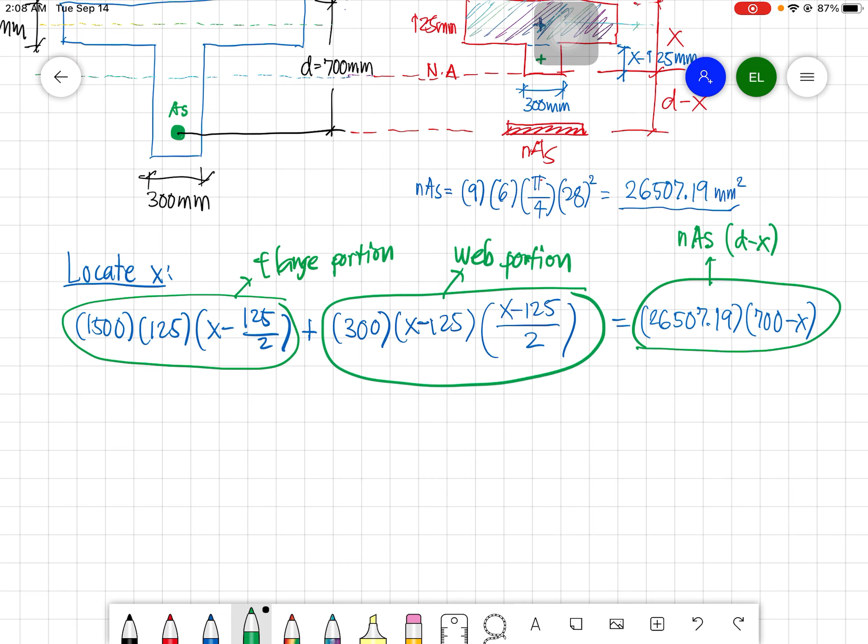Then equate that one. This is the web portion of the beam. Then equate that one to 26,507.19 mm², times x, or d minus x, so 700 minus x. So this portion here is nAs times d minus x. The left side terms are for compression, and the right side terms are for the steel bar. Now let's calculate the value of x.

So I think x there is equal to 141.28 mm. Now this is greater than 125 mm, which is the hf, so the assumption is correct, that x is within the web, outside the flange.

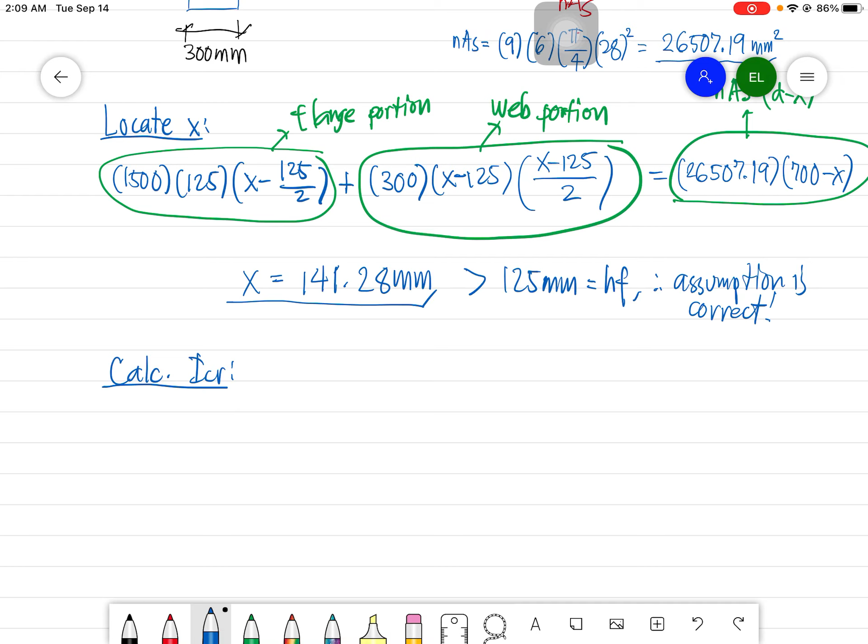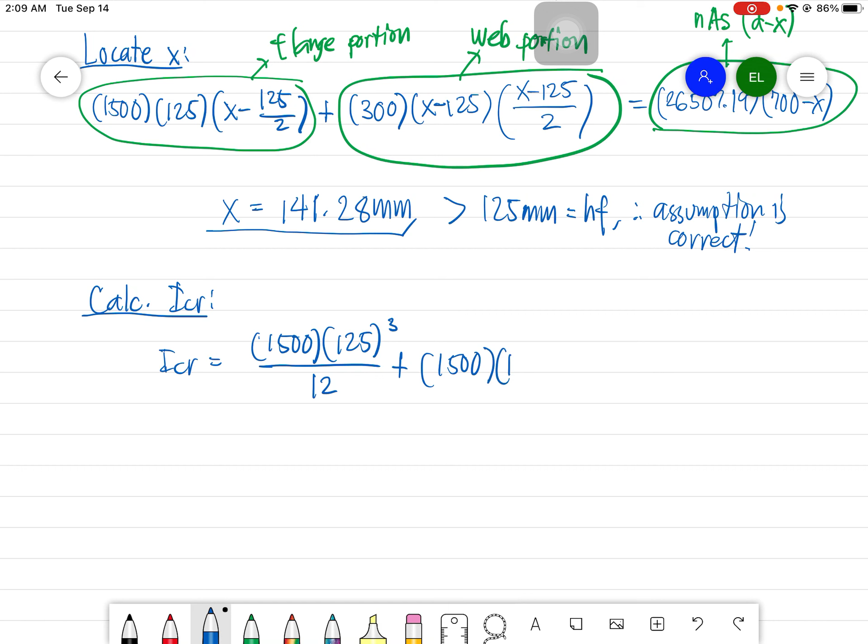So I hope it's clear already. Then we are tasked to calculate ICR. So ICR is equal to 1,500 times 125 cubed over 12, then plus 1,500 times 125 times x minus 125 over 2, squared.

Take note guys that this is for the flange portion, as you can see in the figure. So we are calculating this portion here of the beam.

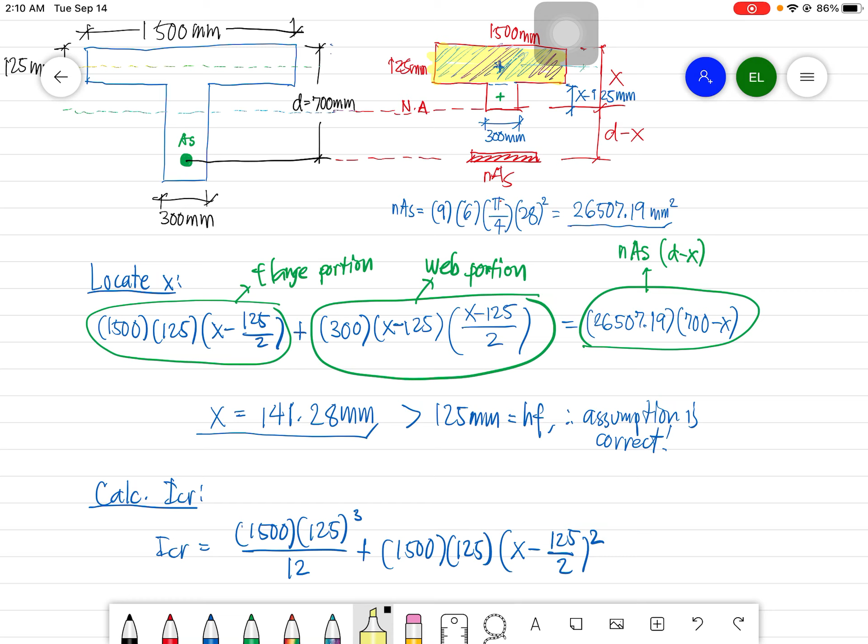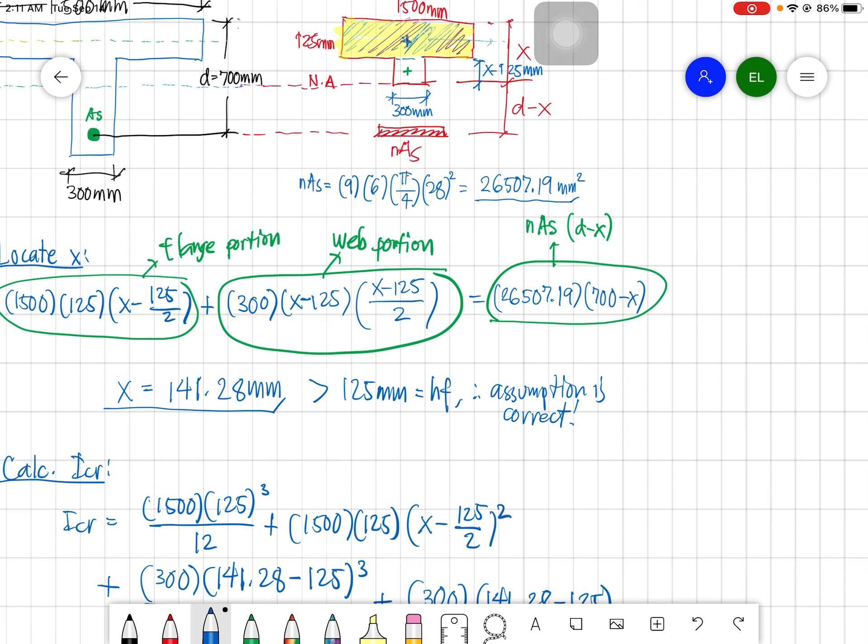Next is to have the web portion. So you have plus b, and then h. So we have x, 141.28, minus 125 cubed per 12, then plus 300 times 141.28 minus 125, then x minus 125 over 2, squared. So this is for the web portion, the second term.

I hope it's clear already. Then plus, do not forget the tension side, which is 26,507.19, times 700 minus x, 141.28 squared. So ICR is equal to 9.68 times 10 raised to 9 mm raised to 4.

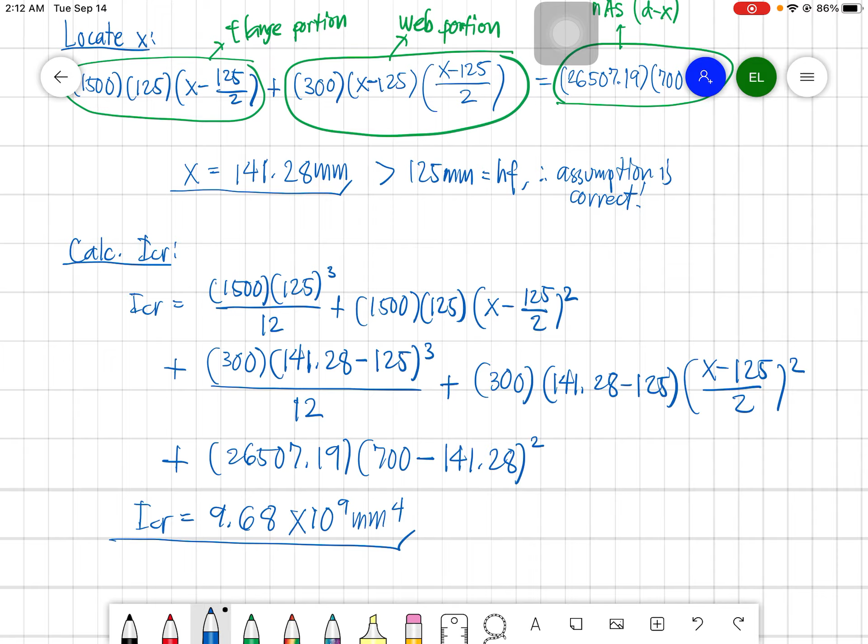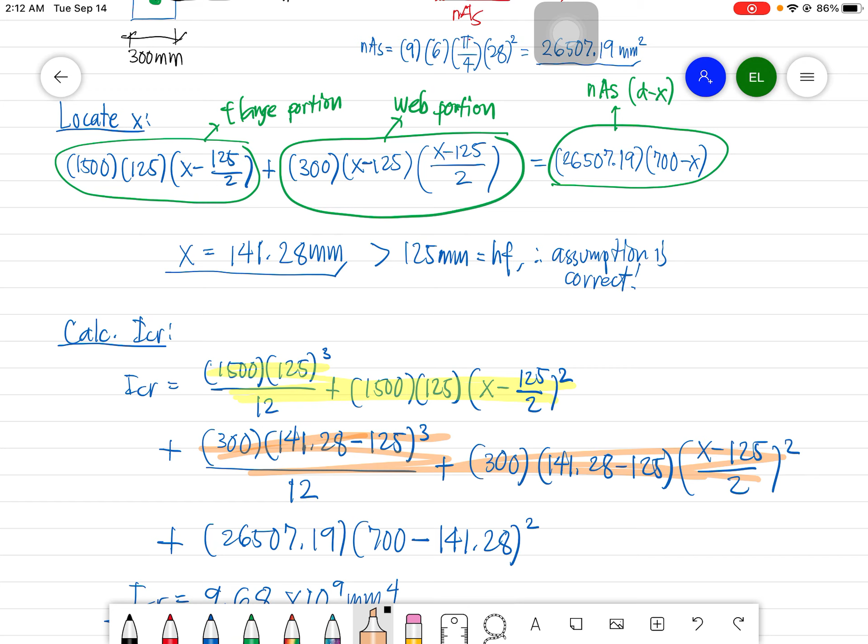So that is for our ICR. This portion here is the flange portion, then this one here is the web portion, and this one here is for the tension side. I hope it was clear already. So therefore we will calculate the stress for concrete and steel.

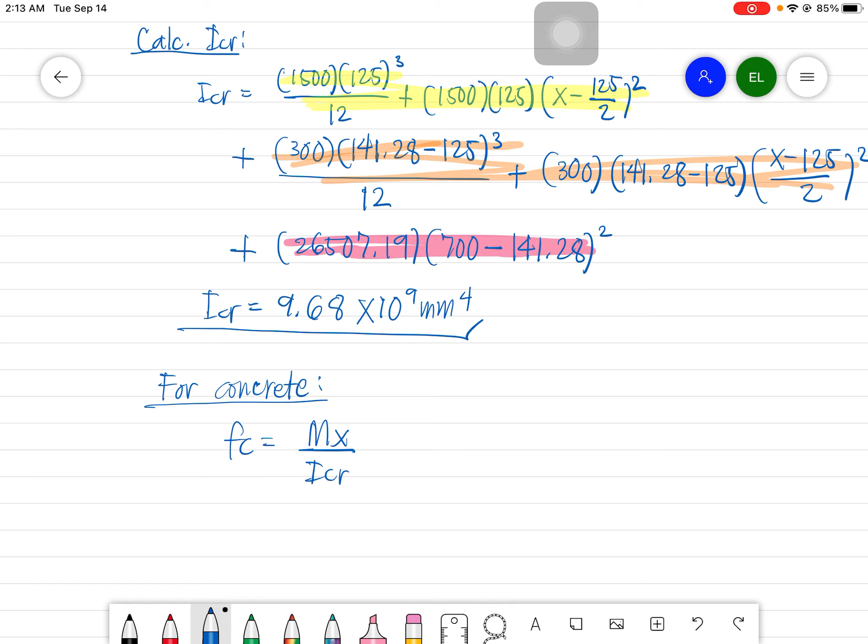So we have for concrete, FC is equal to M times x over ICR. This is equal to 339 times 10 raised to 6, converted into Newton-mm, times x, 141.28, over 9.68 times 10 raised to 9. Therefore FC is equal to 4.95 MPa, the stress for concrete.

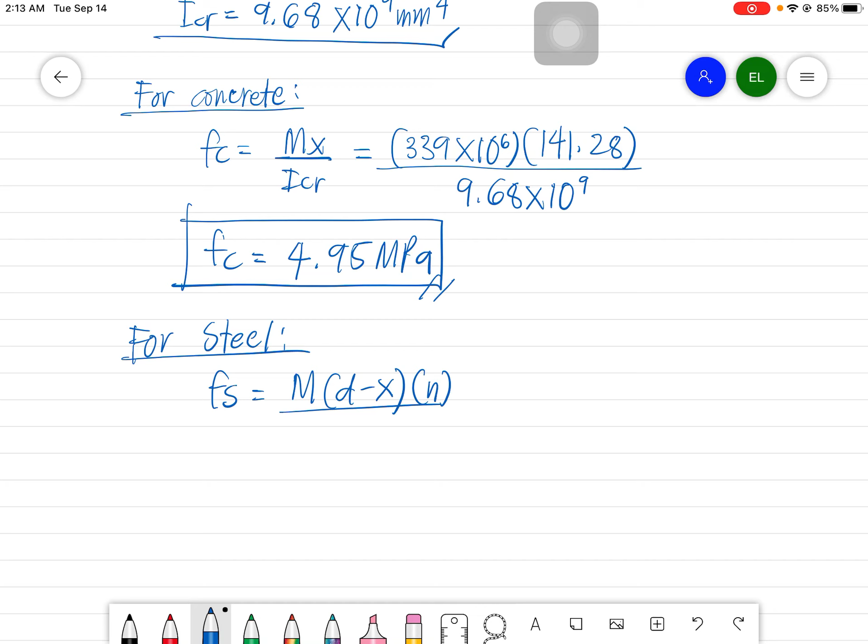Then for Fs, where Fs is equal to M times d minus x, then do not forget to multiply it with the modular ratio n, since that is in the formula for Fs, over ICR. So we have 339 times 10 raised to 6, times 700 minus 141.28, times 9, the value of n, all over 9.68 times 10 raised to 9.

Therefore Fs is equal to 176.1 MPa. So that is the stress for steel.

So I hope the topic for singly reinforced beam for the transformed area method is already clear. So that's all for our topic.